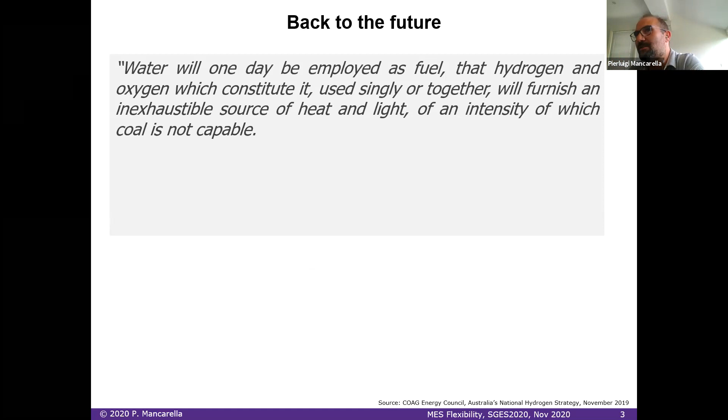Someday, the coal rooms of steamers and the tenders of locomotives will, instead of coal, be stored with these two condensed gases, which will burn in the furnaces with enormous calorific power.

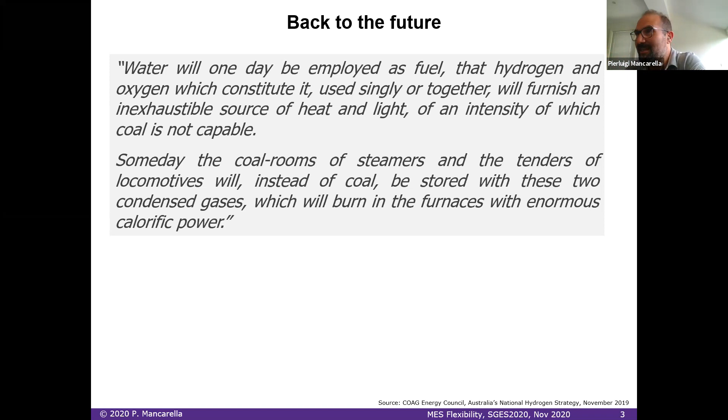So obviously, we're talking here about hydrogen, and I put the title 'Back to the Future.' Why Back to the Future? Because guess who said this, and when? It was Jules Verne, in his great book Mysterious Island. So we're talking about 1874.

There are big discussions now about energy system integration and renewable hydrogen, which I will also mention later. This used to be science fiction, and now it's becoming reality. It's really fascinating what we are living now. I hope what I'm going to show you will excite you in terms of the challenges we might have to deal with in the future. So what is this idea of flexibility?

First, what is power system flexibility as a definition, so I can tell you more about the technical context. We can define it in different ways, and I just picked a couple. For example, the technical ability to regulate the power exchange with the grid — a very generic and general definition.

Or, another definition could be the ability to provide secure and economical supply-demand balance across spatial and temporal scales by leveraging and seamlessly coordinating various controllable assets. Obviously, this one by Dall'Anese is much more specific — it's got to do with security, economics, and spatial and temporal aspects.

This tells us there are multiple dimensions of flexibility, including aspects related to networks, which we'll show later. This flexibility, this ability of regulating power, is particularly important in the context of low-carbon power systems with more and more renewables, which are partly unpredictable and very variable. So we know we will need more and more flexibility, including reserves and other kinds of services.

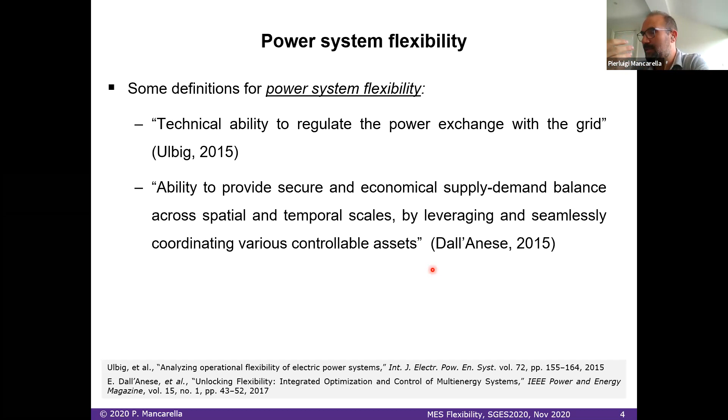But who has historically provided flexibility, and with flexibility, other kinds of services — security services, reliability services? Arguably, anything related to security and reliability comes together with flexibility, or is enabled by flexibility, which is the ability to respond to events in a more or less fast way, considering both active and reactive power.

If you look at this context, I provided a sketch from some work we were doing some time ago with Tomislav Capuder at the University of Zagreb, trying to schematically represent where flexibility comes from. Apart from the obvious inflexible consumption — historical passive demand — and nuclear and coal power plants, which are relatively inflexible...

...then flexibility typically comes from the likes of gas turbines, combined cycles, open cycle gas turbines, and of course hydro systems, or you could import flexibility through interconnectors. For example, there would be flexible generators in the United States or another country, and whenever there's a response needed, this can literally be imported, borrowed from other areas.

What's happening in the future? Well, the moment that, because of renewables, conventional generators may be displaced technically or commercially from the market, we might have issues — because if these are the historical providers of flexibility and they disappear from the system, we still need to provide faster supply-demand balance. Even more so with renewables, we need new sources of flexibility because of their characteristics. So who's going to provide that if the conventional power plants disappear, and what kind of issues might we have?

Yes, and this is obviously something we would really like to avoid. Unfortunately, this is not far future - actually, in a way, it's already past, because we've already seen something like this in Australia, for example, the South Australia blackout in 2016. This is just an example; I don't mean that was caused by lack of flexibility. There are different causes we could discuss at length. But the idea is that clearly there may be an issue with a system changing very, very fast, because it's inevitable with this huge transition we're having, and more transformative targets. There might be problems associated with flexibility.

But there is a problem, there is a solution. That's what engineers do, that's what they've done historically. And who is going to provide help in this case? Great entrepreneurs, and of course new technologies. You will know this already - the South Australia blackout was a big push towards batteries, and then Elon Musk and Tesla came to Australia, investing in what was at the time the largest battery in the world. This battery system in Hornsdale is actually performing exceptionally well, supporting system balancing, provision of ancillary services, particularly various frequency response services, and supplying very fast flexibility.

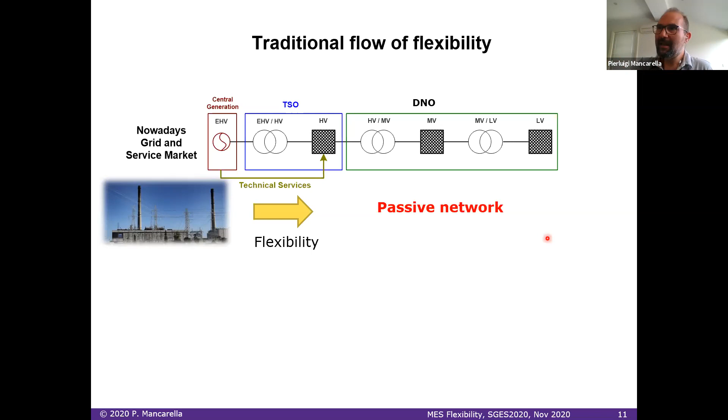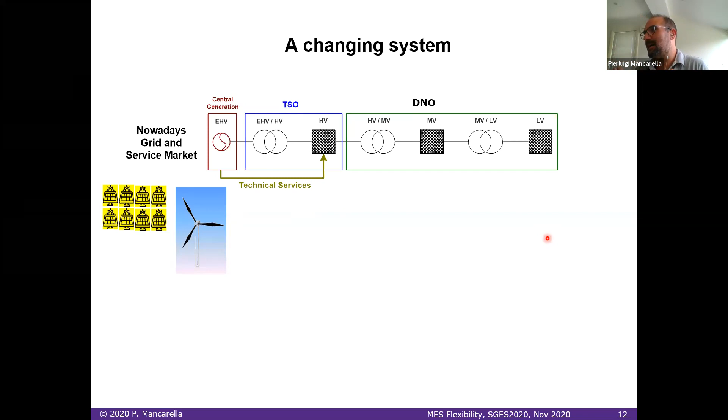However, now with a new system, with more and more renewables - particularly in Australia it's impressive how many large-scale solar farms and wind farms there are - this system is transforming very, very fast. As I was saying, we will require more flexibility because of more renewables, while at the same time there are fewer power plants that could provide that. So it's inevitable that flexibility must come from other sources.

In this sketch I put here, we basically show some potential future that's already happening. This figure is taken from a project called the More Microgrids project - it's more than 10 years old. I was involved in this project when working in Imperial College, and the lead of the project was Professor Hatziargyriou, who gave the keynote the other day. I was working with him on this.

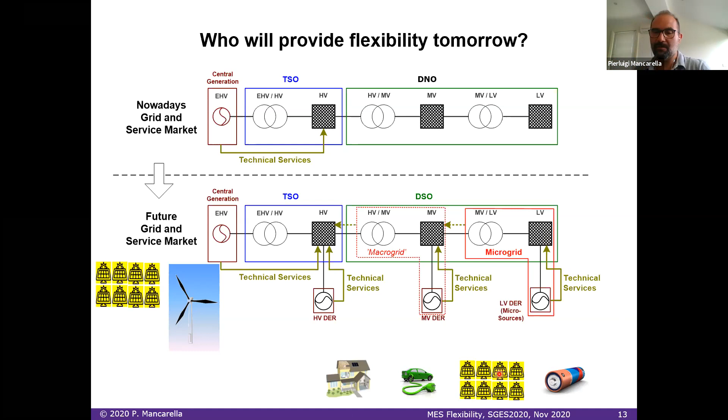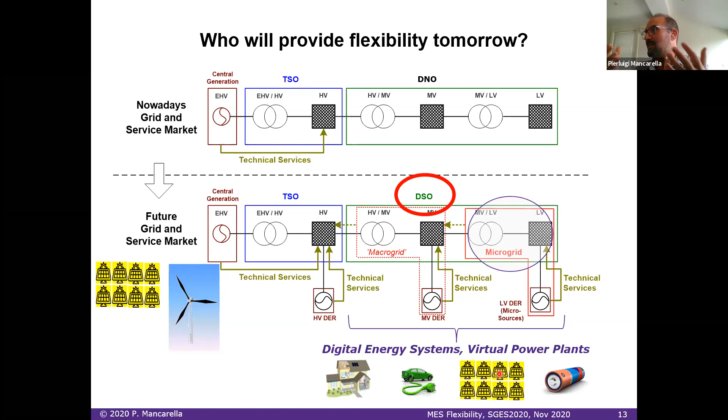It was already fascinating how 10 years ago we were envisaging this future where there would be distributed energy resources, like flexible demand, electric vehicles, and distributed storage in support of PV plants, aggregated in microgrids, which would eventually, with the help of a distribution system operator providing local balancing, set up what today is called digital energy systems, very much associated with virtual power plants providing flexibility to the rest of the energy system. These ideas are not new - they were developed about 15 years ago at least - but now we see these concepts are being implemented, which is great.

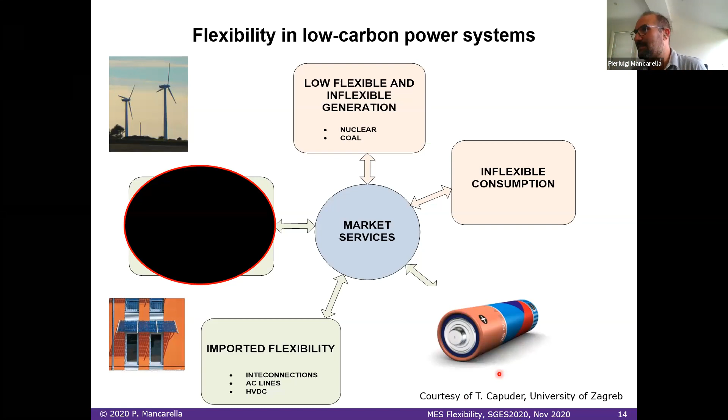So looking at the future, coming from this research developed 15 years ago and now being implemented, projecting forward we may have, for example, batteries supporting the provision of flexibility - and that's it, we're no longer worried about a low carbon energy system, right? Because we have wind, we have solar, we have batteries. Somehow we're done, at least from the point of view of flexibility. There will be other technical issues you may know about, and I'm sure there will be lots of discussion in the conference on issues such as inertia, system strength, and all that. But at least from a flexibility perspective, batteries and storage in general can provide lots of help.

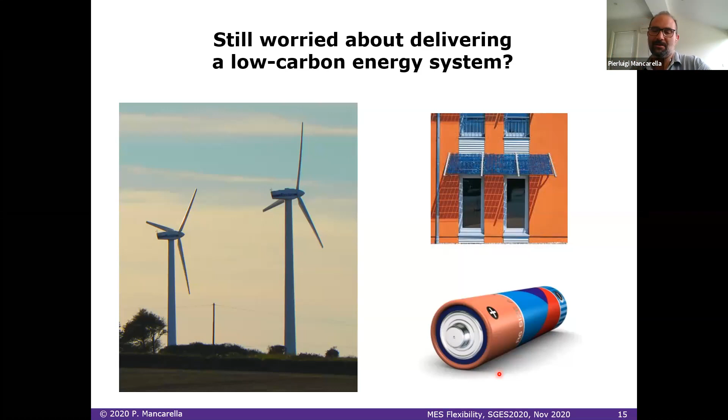Not exactly. I mean, it can help, but it's not still solving the whole problem. And what is the whole problem?

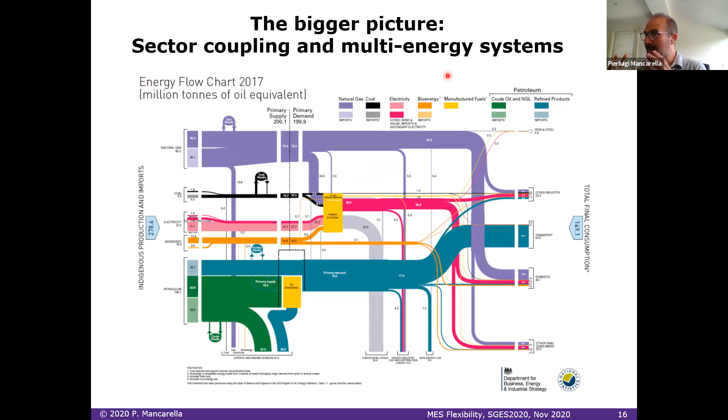So instead of electrification, the idea is let's do integration of energy systems. This idea of sector coupling, so coupling of electricity, transport, heating, gas, and future fuels, and what is now called multi-energy systems, or multiple energy vectors and energy sectors coming together.

There are a few definitions. This is a definition from one of my papers that I was invited by Energy to write some time ago, to explain this concept that was being developed at the time. Effectively, in very general terms, you can say a multi-energy system is a system in which electricity, heat, cooling, fuels, any kind of fuels, transport, optimally interact with each other at different levels.

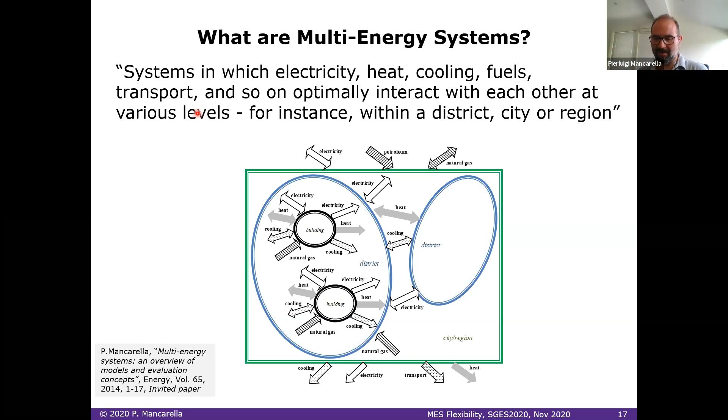This multi-energy system can be a building, a district, a city, or a country, but the idea is how they interact, how they're modeled, how they're optimized together. So this idea really of coupling the sectors, coupling the energy vectors, coupling the systems and the networks.

So when you look at this concept of integrating energy systems, what is now flexibility in multi-energy system terms? Effectively this corresponds to different questions. For example, can other energy systems or vectors provide flexibility to the power system? We are coupling the systems with the idea of facilitating decarbonization, lowering cost, and all that - the so-called energy trilemma in a way.

Now that we are coupling, because there are flexibility requirements on the electricity system, there will be more requirements with more renewables. Can we actually rely on the other energy systems to provide this flexibility - can we use other energy systems to balance electricity supply and demand? And on the other hand, the moment you integrate the systems more and more, can lack of flexibility in other energy vector sectors and networks constrain the operation of the power system? These are the kind of questions associated with multi-energy system flexibility.

There's been lots of work, various papers touching on these aspects, until recently when this paper was published in the Proceedings of the IEEE. It was an invited paper that we were asked to write to firm up this concept of flexibility from multi-energy systems, particularly from distributed multi-energy systems.

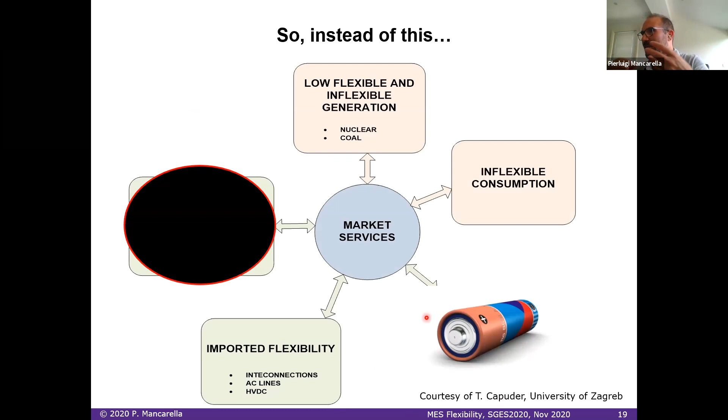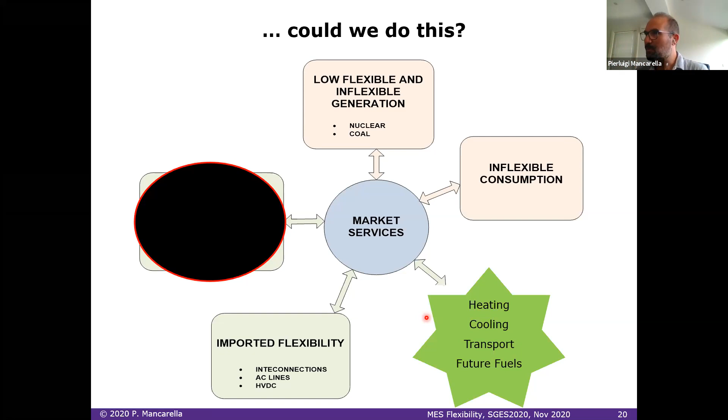So instead of using batteries, for example, or storage like electrical storage or pumped hydro, can we actually use the interface of electricity with other energy sectors—heating, cooling, transport, future fuels like hydrogen, and all the technologies belonging to those energy sectors—the moment you integrate the systems, and use those to provide flexibility? What is the benefit of doing this compared to using batteries or pumped hydro?

Basically, it's a lot cheaper to do this, because if you couple the energy sectors, there are opportunities coming from these other sectors—there may already be embedded flexibility in these other energy sectors. You can probably access flexibility at much cheaper cost than by developing flexibility means specifically in the electricity system. So instead of a battery, can you use flexibility from a building at much lower cost? I'll show you some examples of this.

This is really picking up great interest. In Europe now, this is perhaps the hottest topic. I'm very pleased about this, because I did my PhD on multi-energy systems, and when I presented this back in 2005, 2006, literally no one could understand what I was talking about. Now it's very nice to see that research pays back in the long term, as we always say.

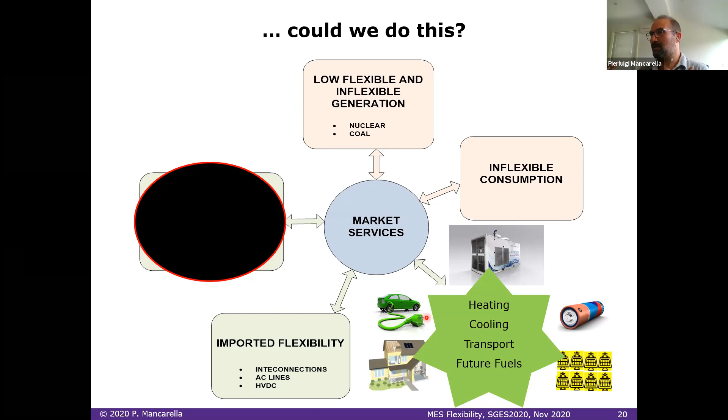This is a very important topic in Europe, I believe, also in China. And now in Australia we're getting more and more interested in this too, particularly in terms of interaction with hydrogen, which I'll show you something about later.

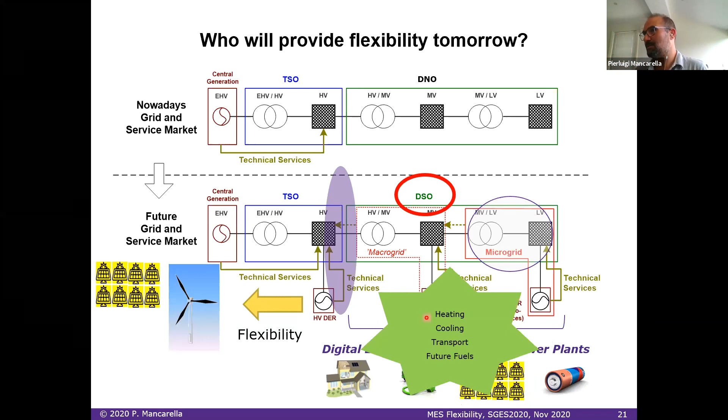When I look at this idea of providing flexibility from distributed energy systems, for example from the demand side, you can see how much of this heating, cooling, transport is all coming from a distribution system. So this idea of providing flexibility not from transmission, but from somewhere else, is perfectly aligned. We say, let's also couple the electricity system with the other energy sectors, because we will be more and more able to access different sources of flexibility.

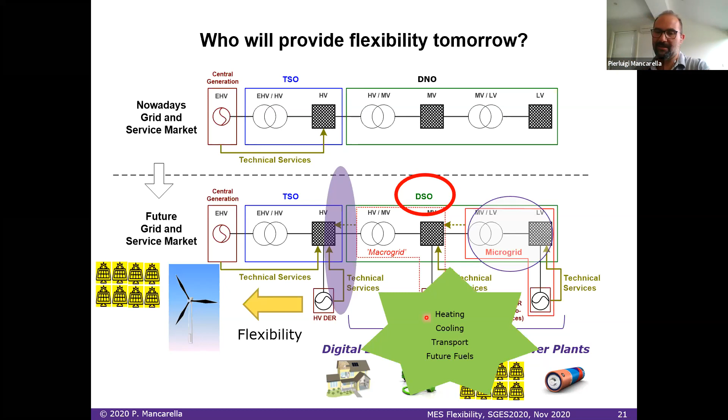And especially when we have more and more digital energy systems where we can measure things better, it will be very beneficial to try to develop these concepts and technologies at scale.

In terms of modeling, there's been a few models dealing with this kind of flexibility in different ways, until recently this paper where we consolidated the ideas into the concept we called multi-energy node, particularly with respect to DMES, distributed multi-energy systems. However, in reality, the formulation we provided is quite general and can be applied to anything.

We defined this flexibility in a multi-energy system context as the set of all feasible deviations in the flow of one energy vector from a given operating point, subject to multi-energy node constraints. So what is the idea?

Imagine you have this kind of black box that can contain networks, storage technologies, different conversion technologies and so on, which you might model as an energy hub or node—some of you might be familiar with this concept. There are multiple energy networks as input, and then there is some local load and generation.

So the idea is, when you consider everything happening inside this black box, inside the hub, how can you modulate the inflow of one vector by considering changes in the other energy flows, taking into account all the constraints that you have in the system.

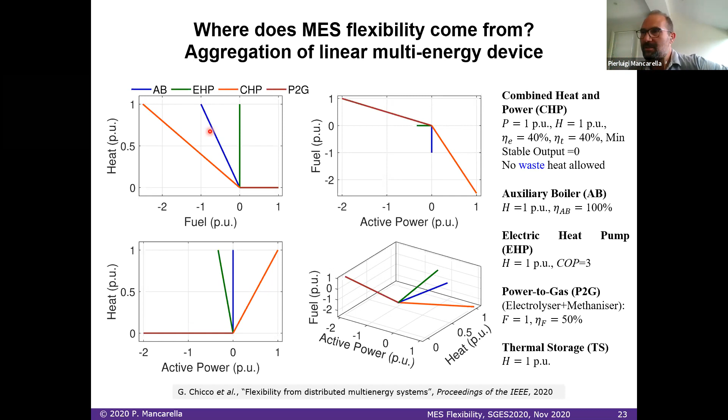So effectively what we've done is show how, by aggregating components—sets of components, and then all together—you suddenly start operating within a region. This region is what flexibility is, because effectively it means I can now operate independently. If you look, for example, at heat and active power, I can now operate independently at any of these operating points. I'm no longer linked to operating at just one point of the linear plot, as in the case where I only had one piece of equipment. The moment I have more devices with different characteristics and bring them together...

...you start having flexibility that you can show mathematically like this. Mathematically, this corresponds to applying a Minkowski summation operation across multi-dimensional spaces, and of course, the multi-dimensional space would be characterized by the different energy vectors being considered.

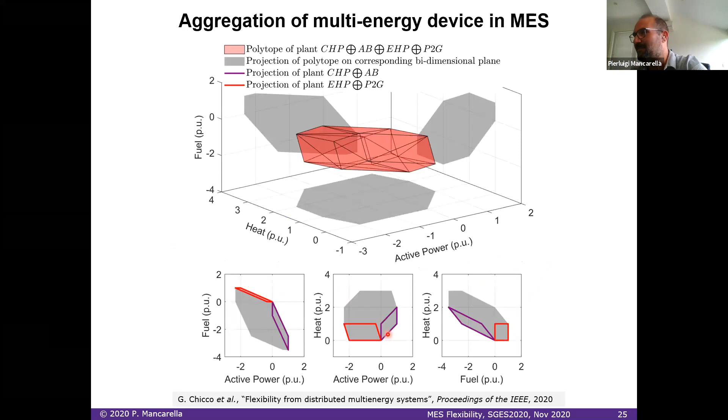And now you understand why you can actually access flexibility from other energy sectors that is, first of all, plentiful, potentially. Second, in a very effective way, because it might be, for example, cheaper to do this. And again, if you are after the mathematical modeling, you can have a look at the paper.

So when you start looking like this, you realize that now you can actually really study different kinds of flexibility features that you can access. For example, the moment that I am interacting with electricity and gas to produce electricity and heat, can I shift between electricity and gas and create flexibility in input? Or the moment that I need to supply a certain output, can I transform energy vectors in a way that can create flexibility? For example, everything that we know as power to X, power to heat, power to gas, or transformation of electricity into heat gas belongs to this kind of category.

Can I play with storage, but not just electrical storage, different forms of storage, and by doing this, enable flexibility on the electricity side? And then can I curtail some service, not again for electricity, but for other energy vectors? And by doing this, again, I generate flexibility.

There are different examples of doing this. For example, a very important one that we are studying in the UK, and has been studied for long in the UK, is the ability of having hybrid systems, for example, to supply heat load by a heat pump and an auxiliary boiler. And therefore, you can basically shift between electricity and gas to supply heat, depending on the situation.

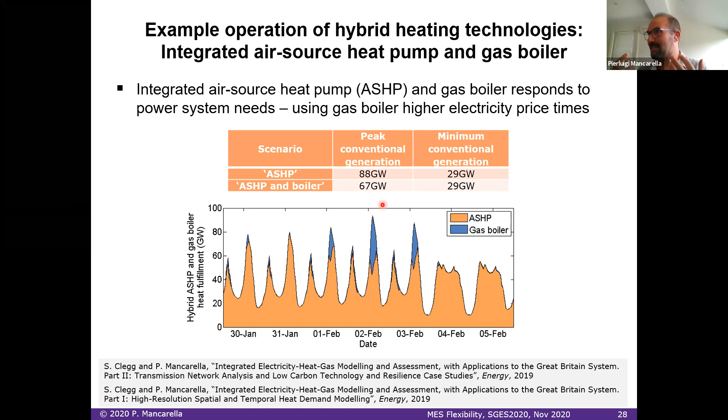We've done several studies in the UK, particularly for the UK National Grid, and we show how in the future the possibility of using a gas boiler as a top up to air source heat pumps, effectively hybrid heat pumps, electrical gas heat pumps, could bring huge benefits in terms of capacity that you could save. In the study we were performing a couple of years ago, the benefits would be in the order of 20 gigawatts of installed capacity. So effectively you would reduce the capacity you would need by about 20 gigawatts, which would correspond to roughly 20-25% of the installed capacity you would need in the system. So huge benefits provided by the possibility of switching between gas and electricity to power heat.

Similarly, we're saying, can you use actually a form of storage that is somehow embedded in other energy vectors?

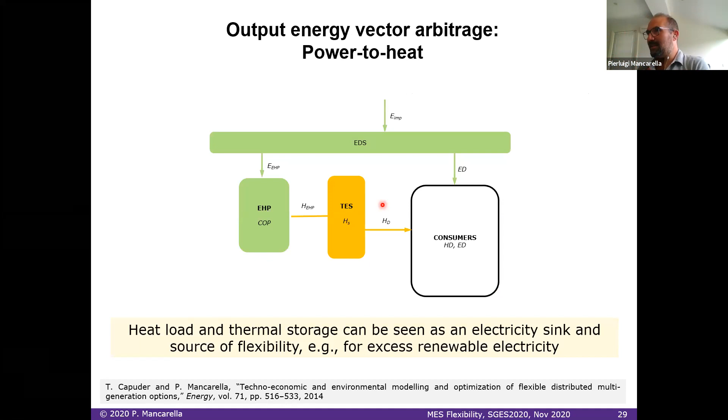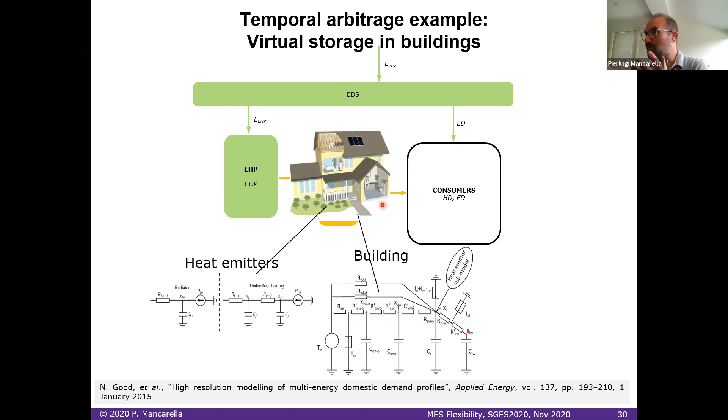Let's take heat as a key example, and this idea of virtual storage in buildings, where effectively you have electricity, you turn it into heat, and you store it somehow in the building. Because you've got thermal inertia in the building, you can play with this virtual storage, and effectively it works as a virtual battery.

What is the virtual battery operation here? Imagine this is taken from an office in London, a real case. You have a baseline consumption, for example a heat pump or air conditioning, and imagine you need to provide flexibility to the system. You switch off your heat pump to provide, for example, reserve service.

When you switch off the heat pump, your consumption changes with respect to baseline, but also your temperature changes inside the building. For example, if you were cooling with a heat pump or air conditioning, the temperature will go up because you reduced consumption. So when your service is finished and you switch the heat pump back on, the temperature has gone up, you need to cool down the environment more, so your consumption would be higher than before.

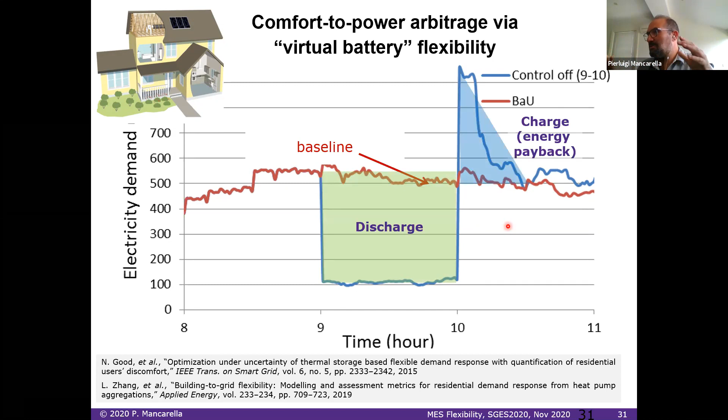This concept is so-called energy payback with respect to baseline. When you do this, it's equivalent to discharging and charging a battery, compared with baseline. Because for the system, I am consuming electricity - switching off is equivalent to injecting power into the system, like a battery discharging. Then, of course, you need to charge your battery back, and that's exactly what you do with the energy payback of the building.

It's pretty extraordinary that your charging of the battery is much less in terms of energy than the discharging. So effectively this virtual battery has an efficiency of 200, 300, 400%. There's no problem with thermodynamics though - as the title says, it's a comfort-to-power arbitrage. This virtual battery, enabled from the thermal inertia of the building, is costing me thermodynamically something, which is temperature. I'm giving up comfort level, and this is enabling flexibility.

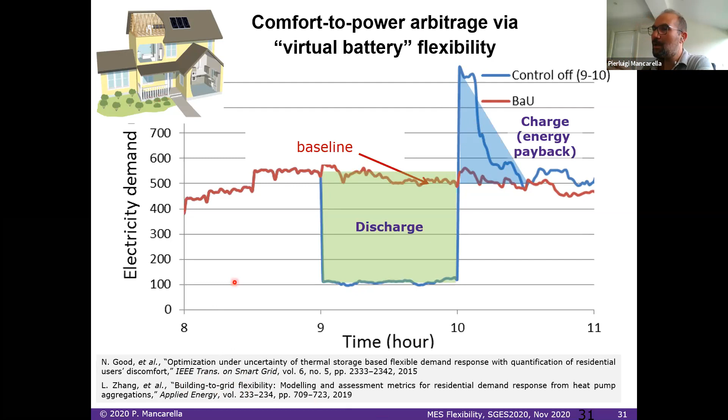And that's an arbitrage between the power and the comfort you're giving up, all enabled by integration of the electricity system with the heating system. If you're interested, you can come up with metrics to measure this - there's a very interesting work, 'building to grid flexibility', where we explain and model all the details of this operation.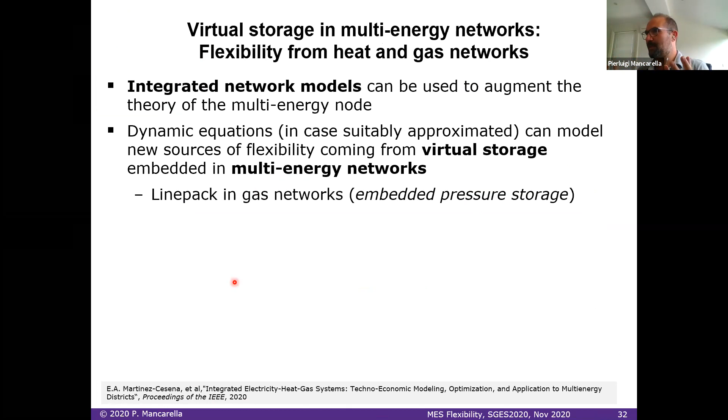You can do the same with networks - use storage embedded in the networks to provide flexibility. Again, the virtual storage is in the networks. For example, if you look at gas networks, storage there is in the form of pressure, the line pack. If you change the pressures of the gas network, you can allow more or less flexibility in the electricity system that's linked to it.

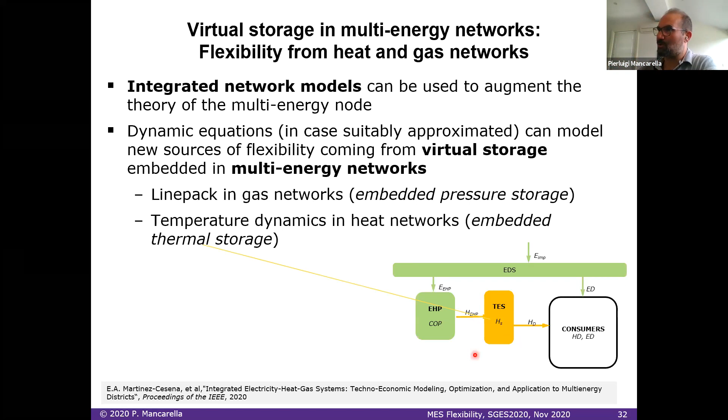If you look at a heat network, because there's lots of hot water in there, that's effectively equivalent to having a thermal store. You can play with the temperature dynamics of the heat network, and it's equivalent to having an embedded thermal energy storage - the same model I was showing you earlier for virtual storage in buildings.

The moment you have peaking requirements from gas generators, if these requirements become very substantial, with very high and long ramps, the generators must get gas supply at the right rate. Can the gas network provide all the gas that's needed? We showed that under various conditions, the gas network doesn't have enough flexibility. There's not enough line pack, not enough pressure in the gas network to actually do that. If you only look at your electrical equations or optimal power flow equations, you would not be able to see any constraints. You'd think your system is working fine, but actually it isn't.

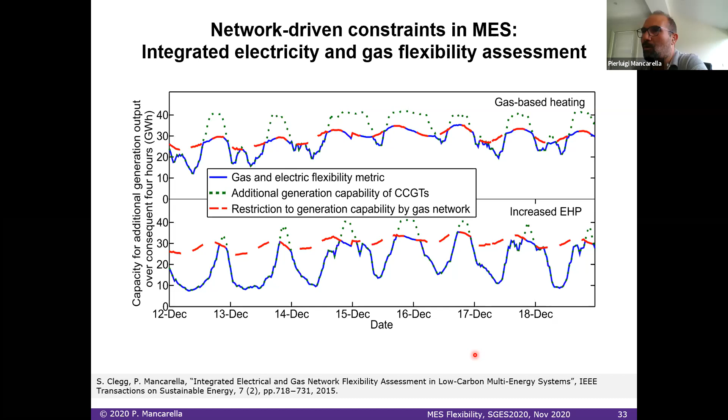However, networks can also provide a form of positive flexibility. For example, if you look at the idea of hydrogen, you use renewables to create hydrogen, then inject it into the gas network and store it, for example, for seasonal storage. It's a nice idea, and some time ago we developed a model for the UK National Grid to understand the potential of the UK gas network to store hydrogen coming from renewables, so green hydrogen.

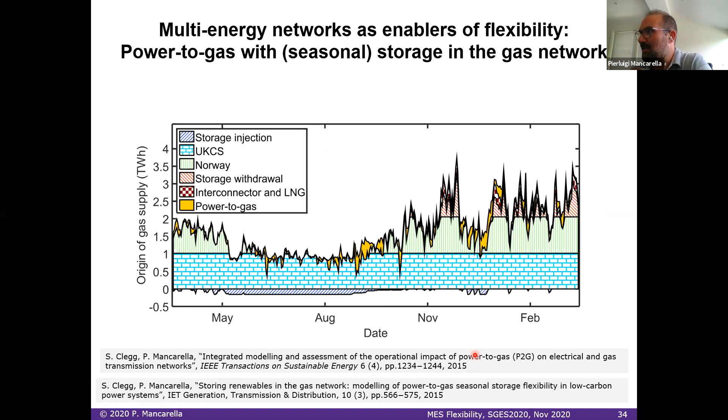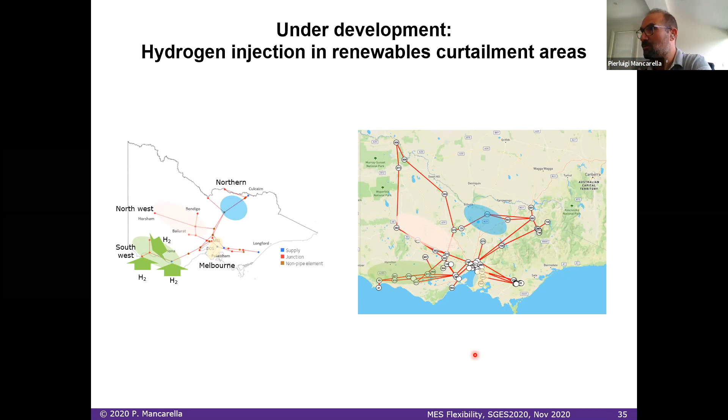However, this is very much an issue of economics, as you can imagine. Now we are doing similar studies in the context of the Future Fuels CRC. We've already modeled the whole Victorian electricity and gas network, and we're studying the interface between renewables curtailment, production of green hydrogen via electrolysis from that curtailment, and potential injection into the Victorian gas network. We already have preliminary results, and it's super interesting and complex to see the interactions of these different systems and markets in the future.

Similarly, once you have all this flexibility, you can use it to play in the market, for example to provide market services. Here's an example of a study case in the Fishermans Bend area in Melbourne, where we developed a feasibility study for a hydrogen system with electrolyzers, hydrogen turbines, and hydrogen storage. This area is full of renewables but is also somehow constrained, and can be represented as an integrated renewables-hydrogen energy hub, then operate as a virtual power plant.

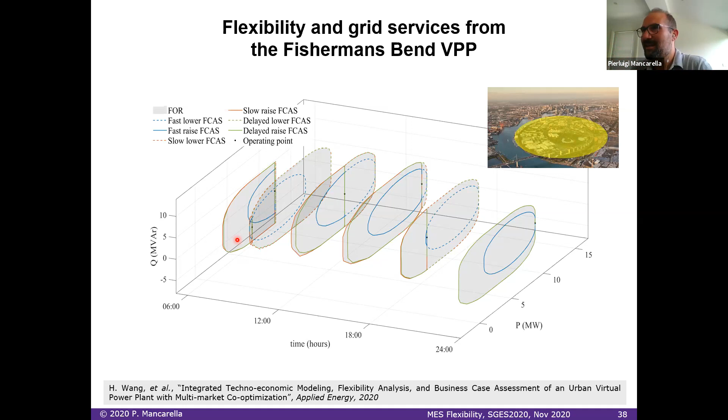Going forward, the interesting thing is to understand more how much you can integrate the systems. For example, can you use the huge amount of renewables available in Australia to generate green fuels like hydrogen and ammonia, and export them? This has been considered in the National Hydrogen Strategy, as you may know.

What we are developing is a tool to assess the feasibility of these studies, particularly looking at win-win situations between renewables and electrolyzers, including export contracts. The modeling tool is an integrated electricity-hydrogen market tool with all the system operating constraints, and it tells you under what conditions you can have positive payback for renewables and hydrogen exports, so that all technologies and market stakeholders are better off.

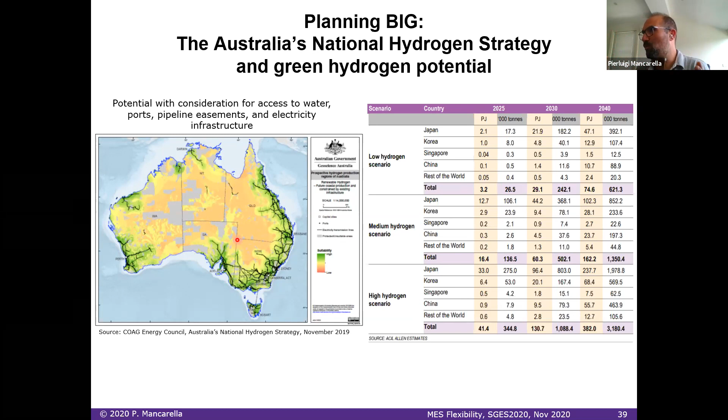It's a very complex analysis, but it's fascinating to see how it is possible to co-develop renewable energy systems and hydrogen systems, including for exports, with a win-win situation for everyone.

This is the way we are modeling and mapping this cost-benefit analysis, and it's very complex. You may have seen similar studies that are very simple, but just don't believe it, because if you look at real market operation and real system operation, it's incredibly complex to achieve that.

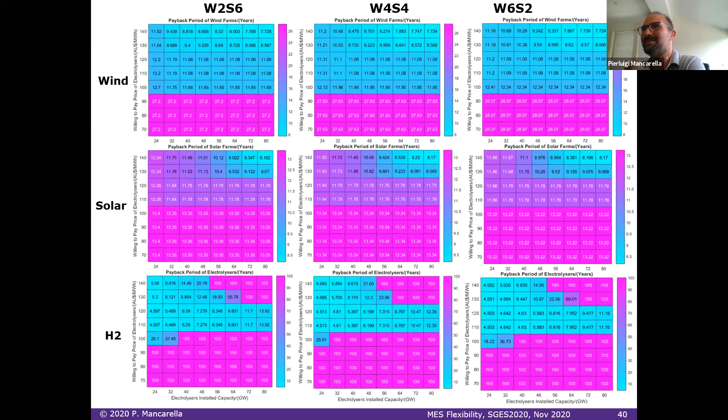One of the big questions is how do you plan for this kind of system, given the huge uncertainty? Take the Integrated System Plan of the Australian system operator, AEMO. There are multiple scenarios, but which scenario is the right one? How do you plan across multiple scenarios? And once you add hydrogen, with lots of uncertainty, how do you plan for that?

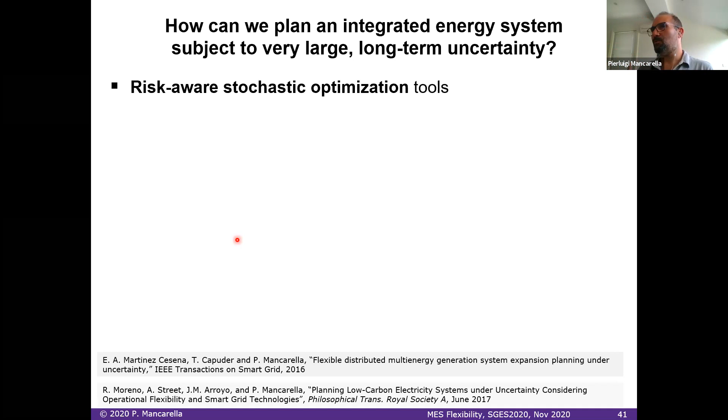I worked on this in the past, and we tested it for the UK National Grid, with whom we just finished a project reviewing the planning methodology. Now they're changing the planning methodology. The tools to use really need to move away from classical deterministic tools, towards risk-aware stochastic optimization tools.

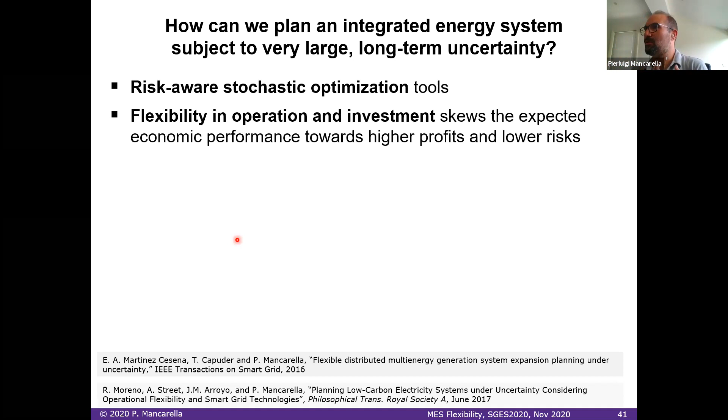This isn't to say things need to become complex using complex mathematical modeling, it's because there is lots of value to gain. What we've demonstrated, and I've included a couple of papers here you can look at, is that the moment you use stochastic tools for this analysis, you can actually reduce the risk of investment and reduce cost or maximize profits.

The modeling work we've done is very convincing, to the point that the UK National Grid and Ofgem, the regulator, are now discussing the tools we've developed as a potential next step in implementation of planning methodology at the transmission system level.

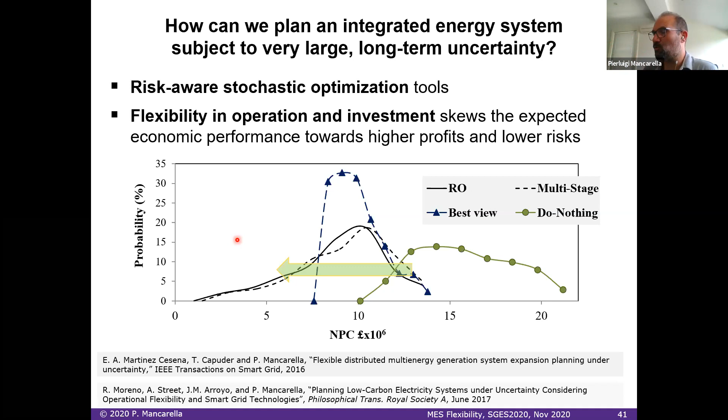Can we do more than that? Can we also think about what we would do for extreme events, so-called resilience, the black swan events? When you look at these extreme events, how do you provide more resilience to the system? Do you make the system stronger, bigger, or smarter? Do you build more infrastructure, or look into smart energy systems?

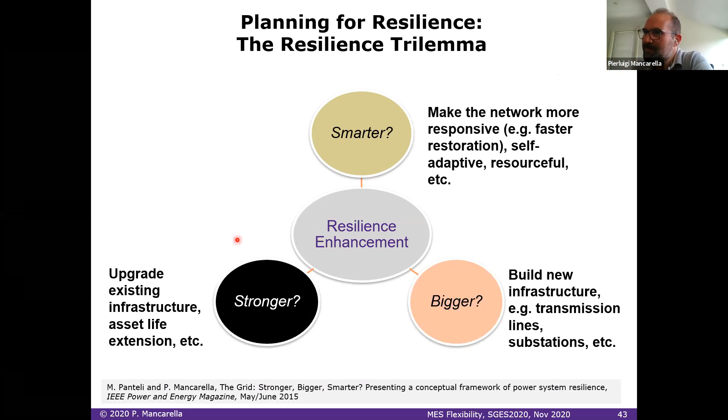What we demonstrate is that if you look at the ability of using distributed energy systems, particularly integrated with other energy vectors like heat and gas, for example through microgrids, the flexibility you can provide can be used for resilience under very extreme conditions. System integration becomes also a form of smartness, and through that smartness you can provide more resilience to the energy system at much lower cost than you would otherwise have to.

Imagine the example before: would you buy a battery if you can do the same with an air conditioning system? You already have the air conditioning, you only need to switch it on and off for one hour, maintaining the indoor temperature subject to constraints. Once you have a digital energy system, this is easy to do.

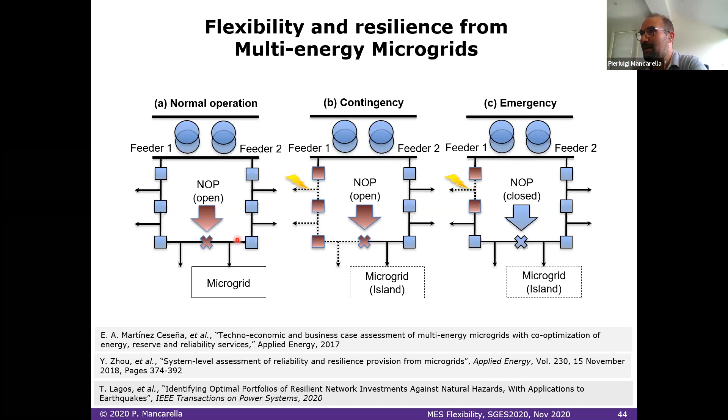The more you look into this kind of flexibility and smartness, the more you realize how many benefits you could provide to the rest of the energy system.

Now, to conclude, I would like to say that superior flexibility can be harnessed by integration of multiple energy systems. It really comes from virtual storage ability or energy vector shifting abilities that can be provided at relatively low cost. The concept is completely scalable, can be applied at any level from building to countries, to provide multiple services interacting with multiple markets.

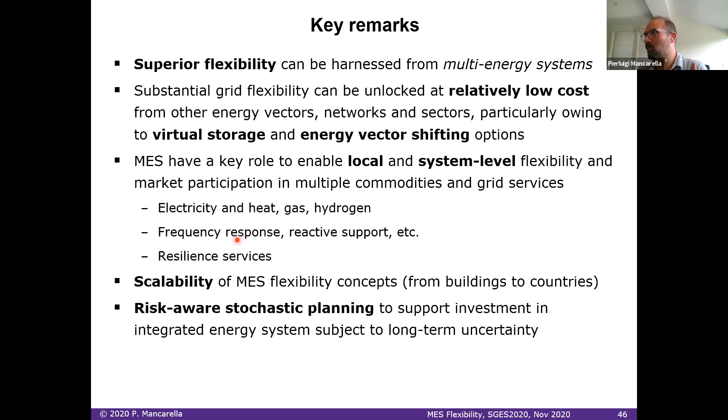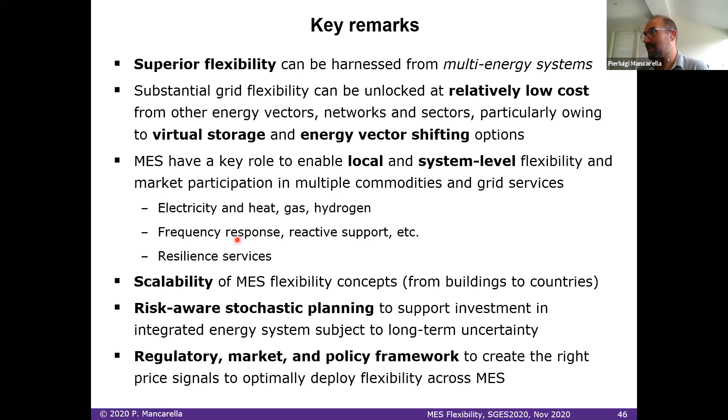Going forward, our suggestion is to really embrace more this stochastic planning. This is feasible—we've already done this in the real world for the UK national grid. And then the moment you do this, it becomes an issue of how the regulatory and market developments can actually support the integration of all these systems.

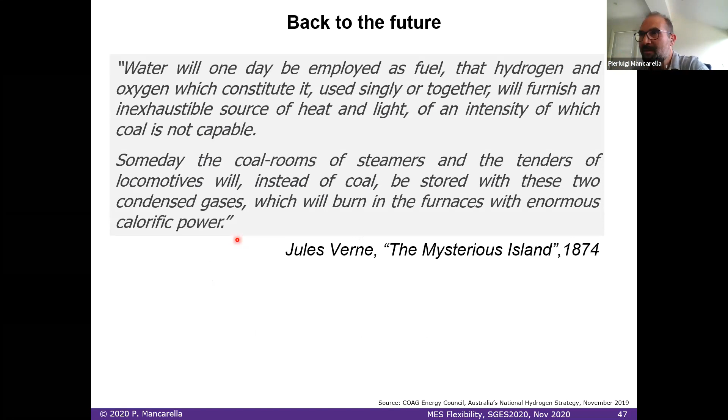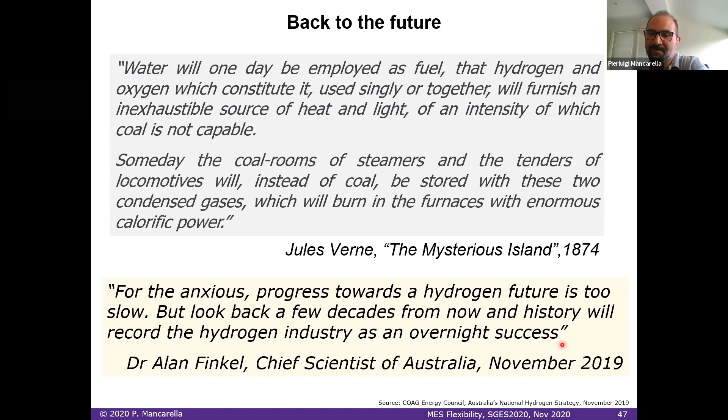To conclude again, back to the future—I mentioned Jules Verne, and now I would like to mention Dr. Alan Finkel, who said: for the anxious, progress towards a hydrogen future is too slow, but look back a few decades from now, and history will record the hydrogen industry as an overnight success. Our chief scientist is a big fan of this system integration, and he's got a very bold statement, bold strategy, as you may know. So I think we should all be looking forward to that.